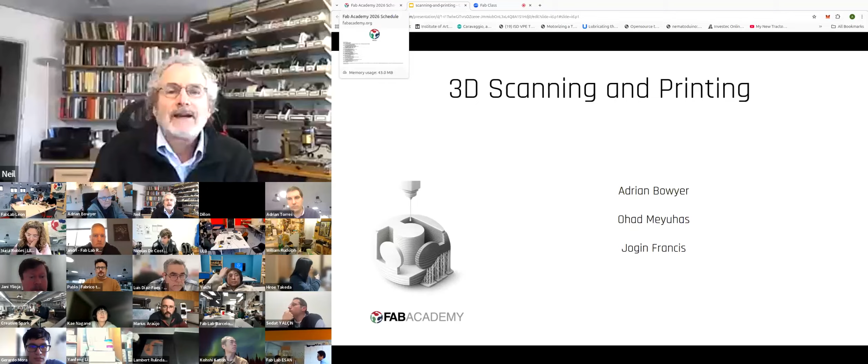So, welcome back. This week is 3D scanning and printing, which you might have thought from the outset was the heart of this class. The goal this week is to learn both the strengths and weaknesses of 3D printing, and we'll be seeing other ways to fabricate.

And we have a dream team for the faculty for this week. So, Jogin, who you met, who did the amazing random generator, was one of the instructors.

Ohad, can you introduce yourself? I'm Ohad. I'm part of the Fab Academy since 2012. I used to work at Stratasys, was the head of innovation, external innovation, and had different roles there. Now I'm doing my PhD on 3D printing multi-material for architecture scale.

Okay, and then the lead faculty this week is Adrian Bowyer, who for many of you might not need introduction. There are many claims to the original invention of 3D printing, but there's really only one claim to Adrian's role, which was he democratized 3D printing. He led turning it into an accessible thing that many people could contribute to and get access to. And so many of the printers around you directly trace back in some genealogy to Adrian, and maybe he'll share some of that.

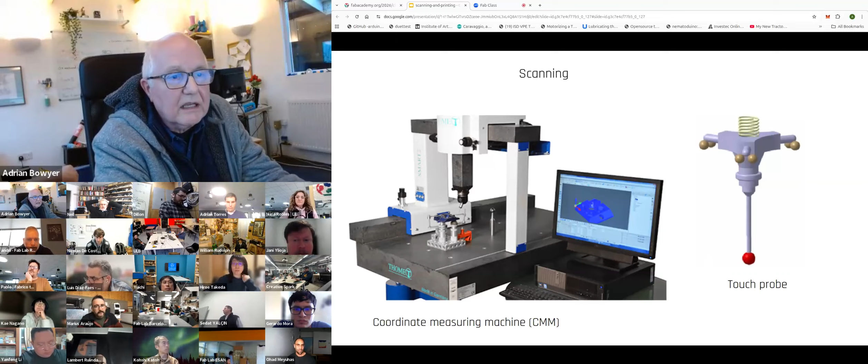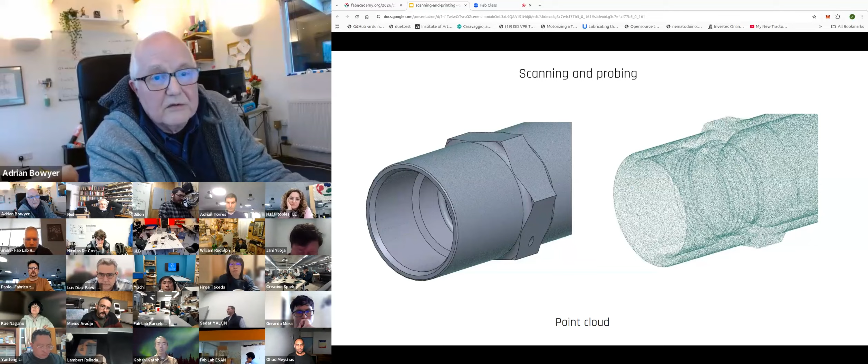We're going to have to turn that into something useful, because we couldn't, for example, take that information and 3D print it directly. We'd have to process it before we got to the point of being able to make a copy of the original object. So we've got to take that point cloud and turn it into something that's more usable.

There's no ambiguity about their surface. As soon as you've got 4 points forming a quadrilateral, those 4 points won't necessarily lie in a plane, and you're not quite sure which diagonal is which and what the surface is that they represent. So triangles, when we say polygons.

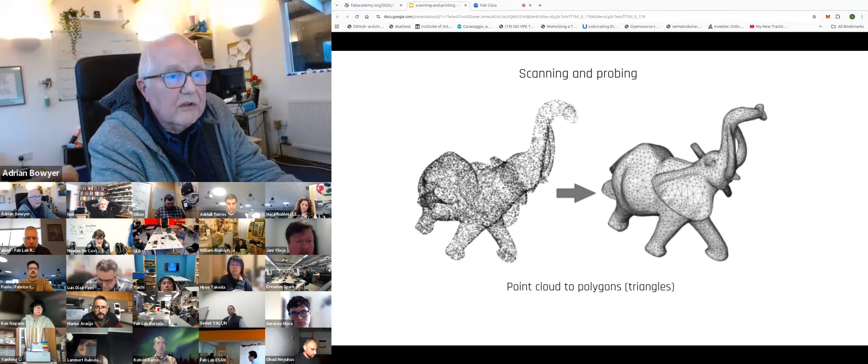You've got another problem to solve if you use the probe technique, and I'll briefly mention it here, which of course is that the thing you measured when you put the probe against the surface was not the surface, but the center of the probe. So it's actually offset from the surface a little way, and you've got to do something about that. I mentioned this because it introduces an idea that we're going to get to a little bit later on, which is the idea of a Minkowski sum.

But forget about touching. What we really want is a system that allows us to measure and scan objects which doesn't require us to touch them at all, so that we can use the same technique that we use when we use our eyes to look at a 3-dimensional scene. Almost all methods of doing this rely on some variation on the idea of binocular stereo vision. What we're doing is trying to reconstruct a solid, in the case of vision, inside our own heads, or in the case of some sort of scanner, inside the computer.

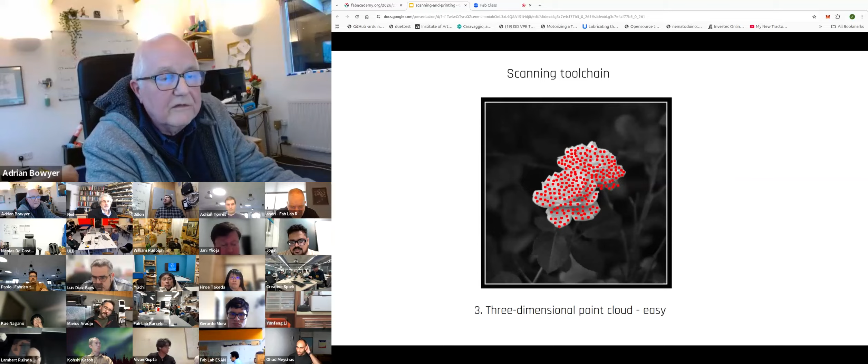And then the final problem that we have to solve is taking that point cloud, as I mentioned before with the elephant, and turning it into some sort of more structured representation of the object that we scanned. In other words, we have to triangulate it. And this, once again, is a hard problem. It's fairly easy for areas which are broadly flat, but where we've got lots of detail, it suddenly gets very difficult very quickly. So we've got these four stages to the process, two of them easy and two of them hard.

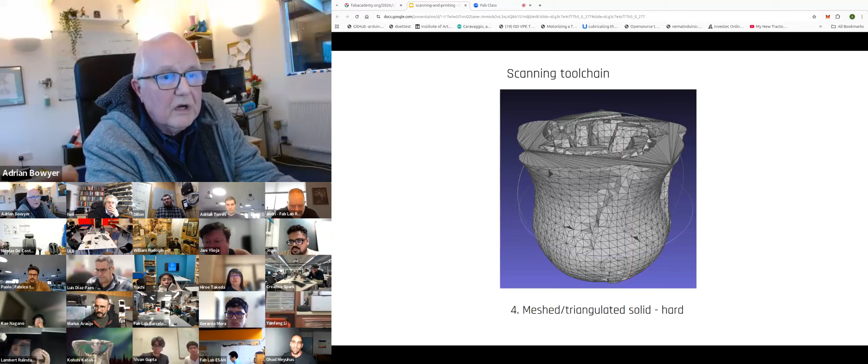Okay, let's look at the point correspondence problem to start off with. We can simplify that by forgetting about the fact that we might have two images, just have one image, but structure the light which is illuminating the object that we wish to scan.

So we might have a camera that's producing the picture that you can see, and then instead of a second camera to produce the second image, or instead of moving the camera to produce the second image, what we might do is to shine a laser into our scene, which will produce a bright dot on the object. And we've now got a piece of geometry which we can very straightforwardly analyze.

The computer can spot the bright dot on the image with no difficulty whatsoever. And once we've got that bright dot, because we know where the laser is and which way it's pointing, and we know where the camera is and which way it's pointing, we've got the 3-dimensional coordinates of the dot.

There are a whole series of different approaches to this problem that basically use the same idea: we have a camera and some form of structured light, the simplest being a sharp, fine beam of light like a laser produces, or a sheet of light such as a supermarket scanner uses to scan a barcode. There are all sorts of ways to structure light in order to figure out where that light hits the object we want to scan in space.

So this is one approach to the point correspondence problem. It short circuits the difficulty of recognizing that the corner of a petal in one image is the same thing as the corner of the same petal in a second image.

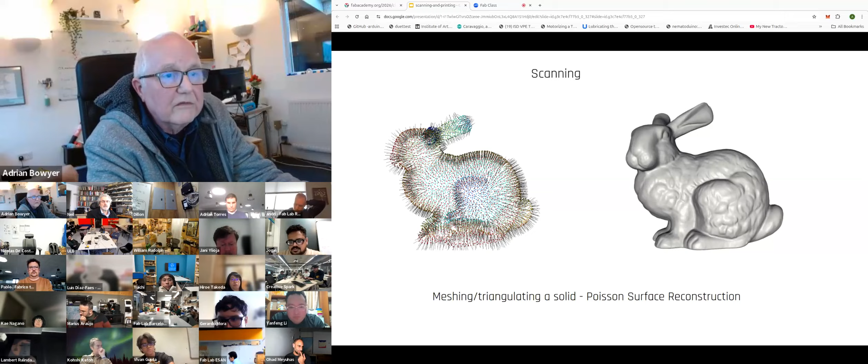It has 2 cameras within it, and it projects a pattern of infrared light onto the object to be scanned, which is rotated on a turntable connected by a white wire. The object rotates, the pattern of infrared light is projected on it, the cameras pick that pattern up and work out the surface of the object.

One of the nice things here is that because you've got the cameras, you can turn the infrared light off and see what color the object is where the infrared light used to hit it. That allows you not only to scan the object, but also to have a 3-dimensional representation of it in color, because the cameras can pick that up when they're not doing the actual scanning with light.

So this is a fairly straightforward machine. It costs about $300, I think - I can't quite remember what it cost when I bought it, but something like that. So they're not horrendously expensive. Quite a few Fab Labs have got exactly this device, which plugs into your laptop and allows you to scan an object and produce a 3-dimensional representation of it inside the computer as a triangulation, which you can then read into a CAD system reasonably painlessly. So that is a solved problem, albeit requiring some quite intensive computational work going on in the background.

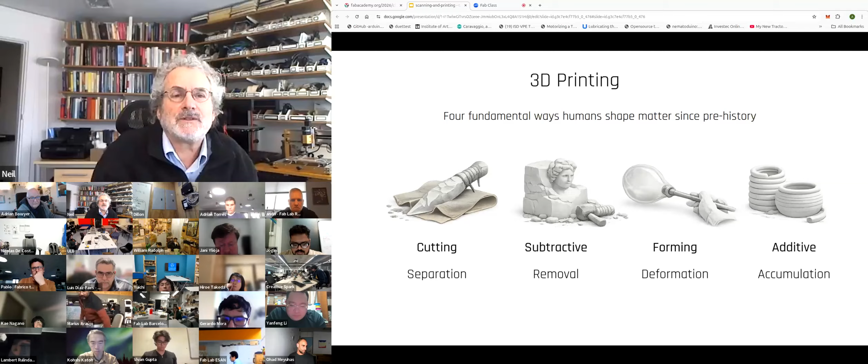Yes, indeed. And you can get such devices which project a whole pattern, an 8x8 pattern of timed beams, which will come back and give you an entire surface map of the object you're looking at. The typical ranges you can scan over with those is from, say, perhaps 200 millimeters out to 4 meters, something like that. So the latest generation iPhones have whole imagers actually doing this picosecond timing, so it's going to rapidly displace how we scan.

Okay, 3D printing. 3D printing is a way of making things. Let's look at making things. There are 4 fundamental ways humans make shape in solid objects, right since prehistory. Obviously, we can cut things - we could cut leather, we can cut cloth that we've made, or we can chisel material away.

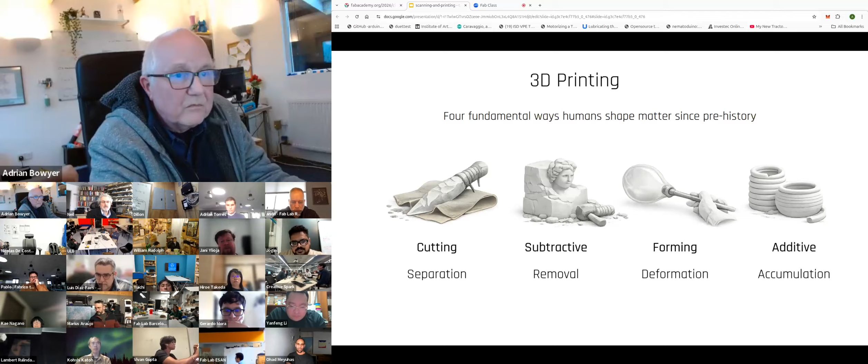We can take a block of material and subtract material from it to leave the shape we want. We can take material that's deformable, for example viscous but molten glass, and deform it into the shape we want. Or we can add material to make up the shape we want, for example as we might do with rolled out sausages of clay to make a pot. We're going to look at 2 of these in a little bit more detail in a while, but let's just go back and look at the history of 3D printing itself for the moment, and then we'll look at 2 of those 4 methods and compare them, one of which will be 3D printing.

So 3D printing goes back a surprisingly long way. This is almost 100 years old - it dates back to the 1930s. Many of you will have seen that these days people are 3D printing buildings by having a large Cartesian robot that moves a deposition head about to put concrete down. Well, here is William Urschel's 3D printer for producing buildings, and we've got a rather speeded up movie on the right-hand side there.

These buildings had to be cylindrical - it was 100 years ago. And what's more, the material had to be put in by hand, but you could stop it and form a window, as you've just seen.

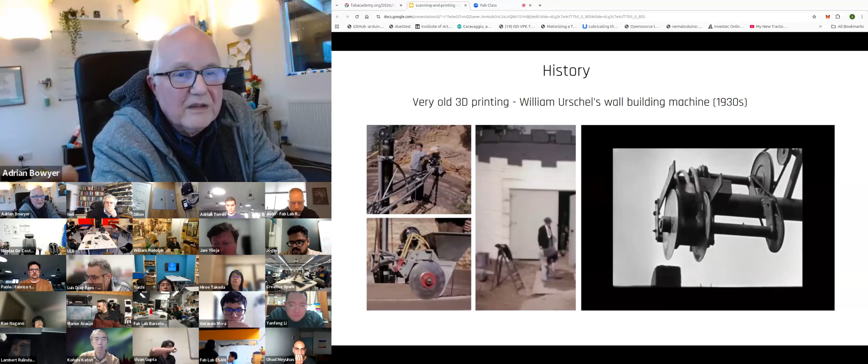Basically, two people had to continually be pouring cement that they'd mixed up into the right head of this machine in order to construct these circular buildings. This, as far as I'm aware, is the first thing that could really be called a 3D printer in the modern sense, and it was just about before the start of the Second World War.

The idea is that you have some photoresist material, a liquid monomer that polymerizes when light hits it, and you shine two lasers into it. At the intersection of the beams, the polymer is formed from the monomer because it sets in the presence of sufficiently intense light from those two lasers. In the notes, you'll find a link to two-photon 3D printing, and this idea is essentially that. It dates right back to this concept that Jones wrote as a joke, because he didn't think it would actually be possible to do back in 1974.

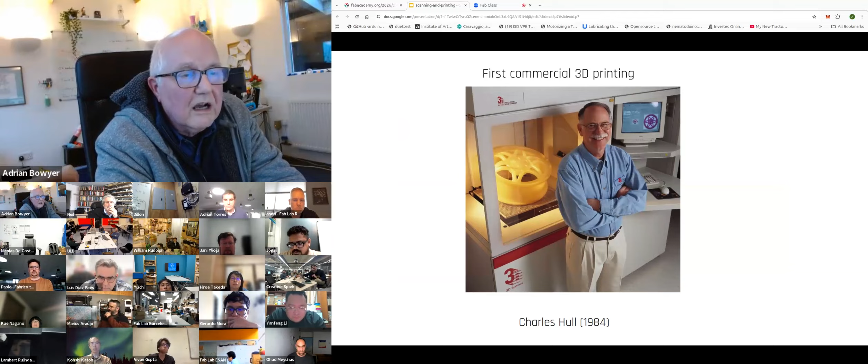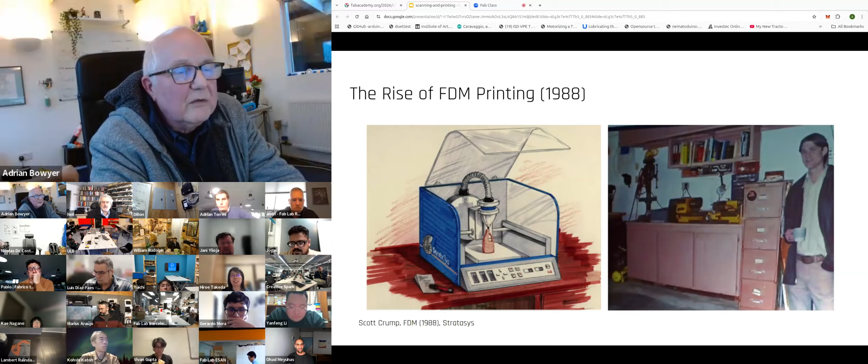Which he called FDM. He did it because, I'm told this by Ohad, his child requested him to produce a model toy, and they couldn't get to the shops. So he made the model with a glue gun, literally using it to scribble in three dimensions to make a plastic toy for his child. He then realized that this might form the basis of a production process. We'll be talking about this in considerable detail in a minute.

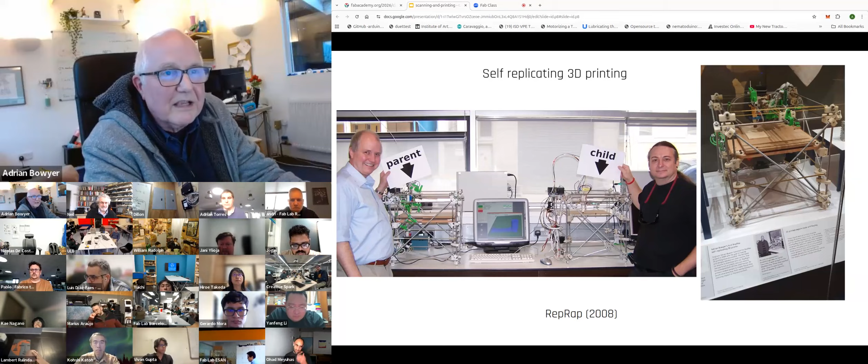You can almost certainly see from my image that I'm horribly old. I can tell you that it doesn't feel any older than it's possible to feel until you find your own object in the Science Museum in London. There it is on the right. I'm afraid that my own creations are now museum pieces, and there it is - that's the very first machine, also the one in the photograph on the left. So that's a 3D printer printing the parts for another 3D printer.

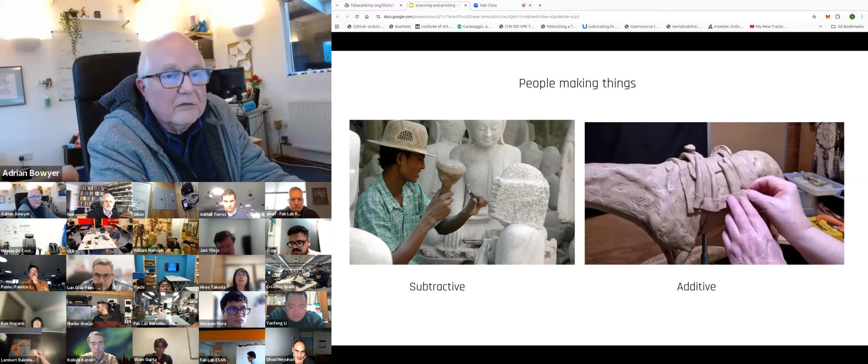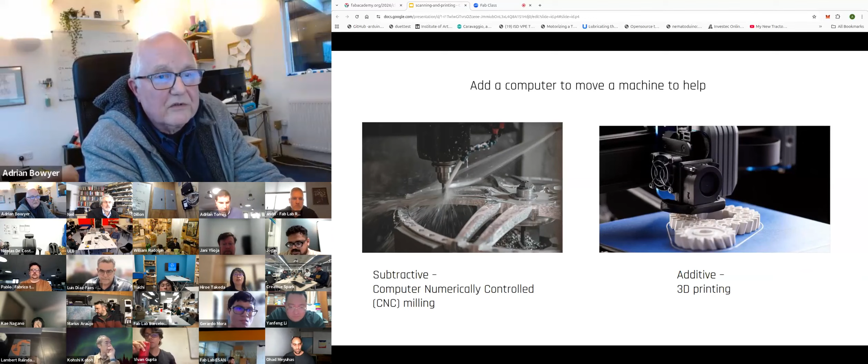Let's contrast these, as these are two principal ways of making three-dimensional objects, and see how they compare with one another. We'll start with the advantages of 3D printing, but we'll get onto the disadvantages in a little while.

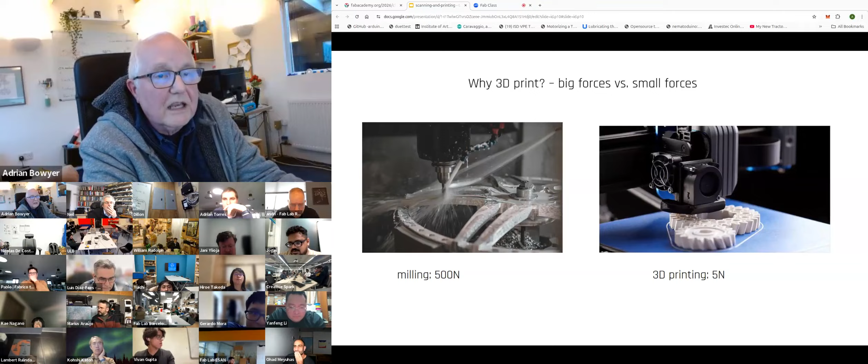So why 3D print? Well, the first and most obvious reason is big forces versus small forces. The sorts of forces you get with CNC milling are typically something like 500 newtons, perhaps. You need very rigid machinery with big castings in order to hold everything in the right place to resist those forces. In contrast, when you're 3D printing something, the typical forces you might be dealing with are something like 5 newtons, 100 times smaller. Admittedly, the process is slower, but nonetheless, the forces involved are comparatively negligible compared to those used with milling.

In contrast, with 3D printing we're always building in flat layers, which means the 3D printer really only has to worry about 2 dimensions and calculate things in 2 dimensions in order to solve the problem of manufacturing the object we want. Now, if you've ever written any software for dealing with geometric problems, one thing you'll have found is that as the number of dimensions increases, the difficulty of the software and the problems you encounter get an awful lot worse. So controlling a 5-axis CNC mill is simply a much more difficult computational problem than controlling a 3D printer, which only has to effectively, at any one time, work in 2 dimensions.

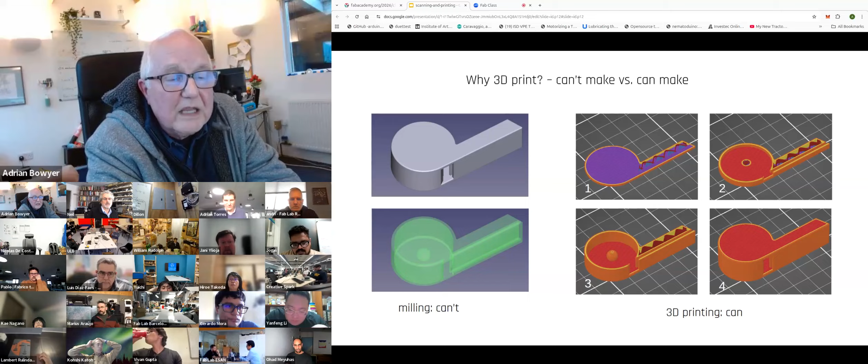On the other hand, if we 3D print this in layers, there's an illustration 1, 2, 3, 4 of the printing at different stages, we always have access because of the reason I mentioned on the last slide. So we can print the entire object, but we couldn't mill it. The little pea is still attached to the base of the print when it comes off the machine, but all we do is reach in with a small screwdriver, flip it away from the base, whereupon it rattles around the inside and makes the right noise.

The top of the whistle that you can see there, the dark red color in the final picture, that's unsupported when it's printed, and we'll talk about that in a minute.

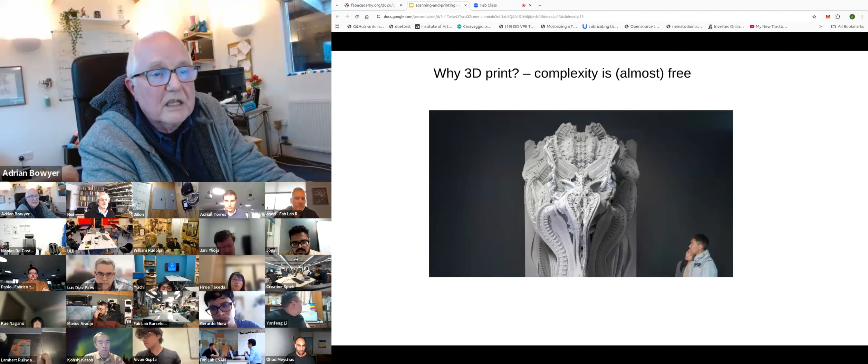Another thing with 3D printing is that complexity is almost free. The more complicated something you're milling, the more difficult that milling operation is, and the more time it will almost certainly take. No matter how complicated something is, you can almost certainly 3D print it in pretty much the same time as it takes to print something that's quite simple in shape.

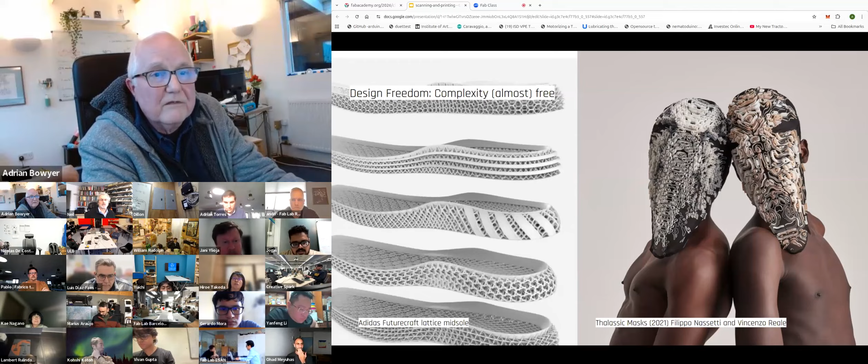Another advantage: milling creates waste. When you're cutting material, you get swarf, and that has to be disposed of and recycled. 3D printing is a near net shape process. We occasionally have extra material which we throw away, but nonetheless it's a much neater and tidier process with less waste material than milling.

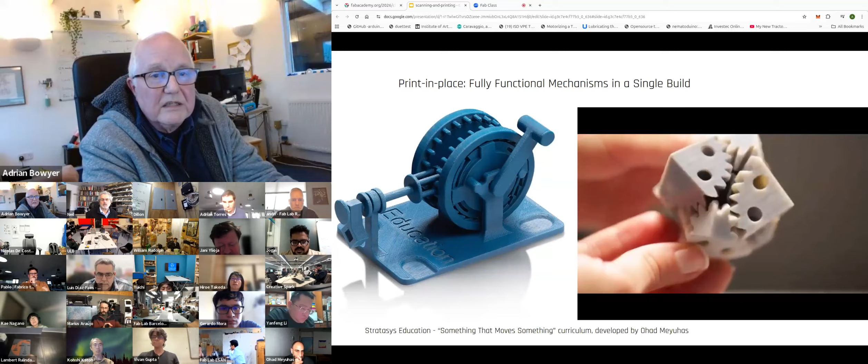Another thing we can do with 3D printing is make functional objects in a single shot, which is virtually impossible with CNC milling, and we'll look at this in a little while. In other words, the objects on the right were made in a 3D printer in one go. They weren't made in pieces and then subsequently assembled.

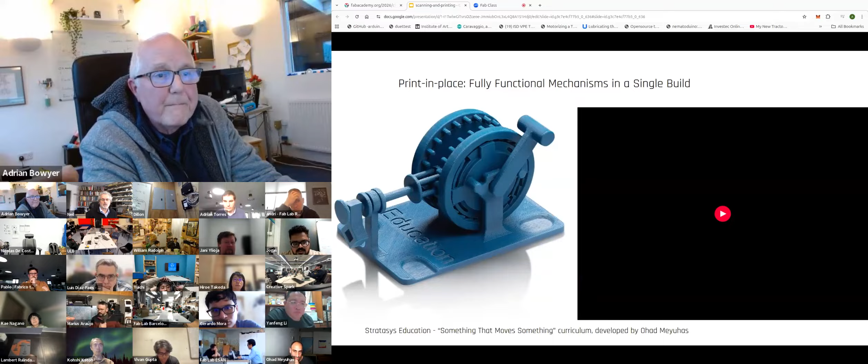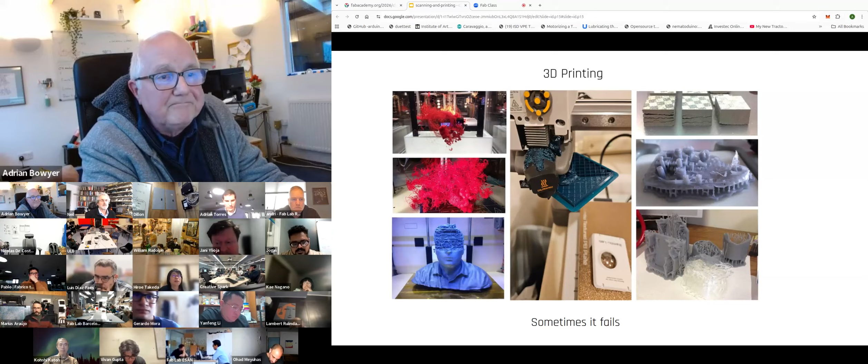SLA printing can also fail. We find that objects distort when they're not properly supported, and we'll get into that later. So it's not a perfect process.

I'm going to start by looking at FFF 3D printing. Most people know how this works, illustrated on the right in that little movie. We're extruding molten plastic, and it's sticking down to the plastic we've already laid down to form the next layer. We have a spool of filament, illustrated on the left, that's forced down through a heated nozzle. It melts, comes out from the bottom of the nozzle, and we build it onto the object. We have a build platform that gradually descends, or the head gradually ascends, and we build the object up this way. As I mentioned earlier, it's basically a computer-controlled hot glue gun.

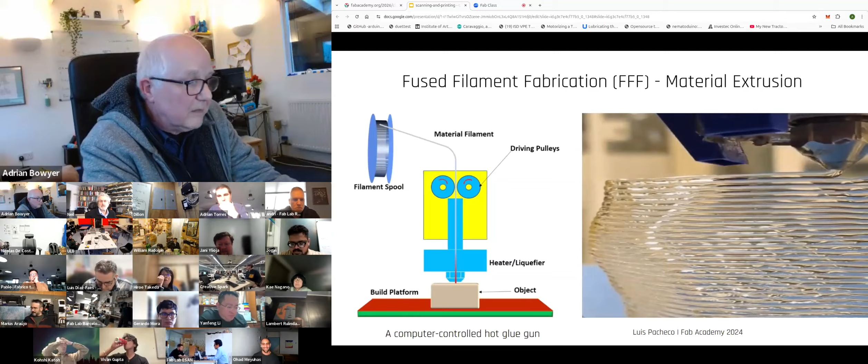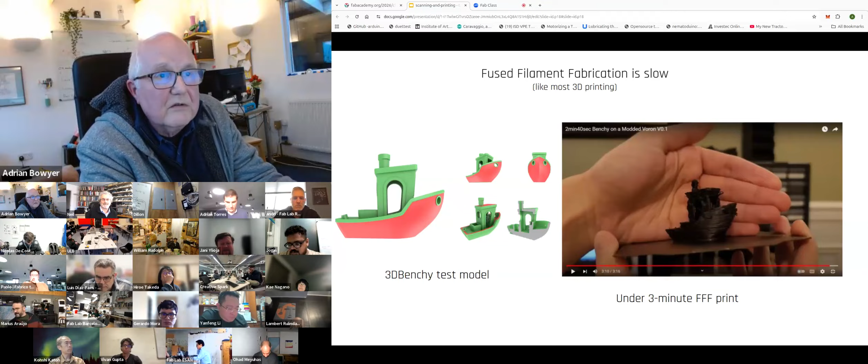Now, this is a slow process. On the left we have an illustration of a standard test object called 3D Benchy, and we'll return to that in a minute. But if we try to make something like this really fast, for example on the right there's an attempt to make this in 3 minutes, and you can see the result was not the highest quality. So it's a comparatively slow process to make things. That's the first disadvantage.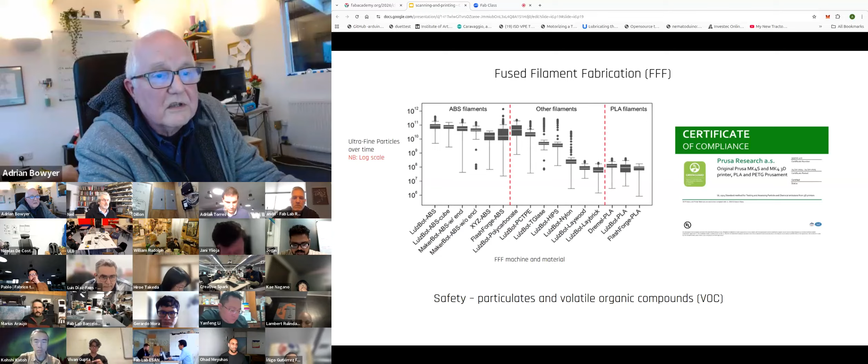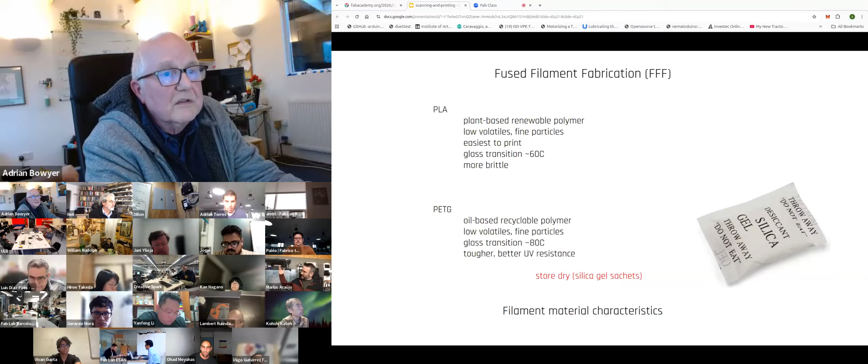PLA and PETG are the two most likely polymers you're going to encounter. PLA is plant-based. It's got a fairly low glass transition, so it won't work at very high temperatures, but it's very easy to print and works very well. PETG works at slightly higher temperatures and also has better UV resistance. Having said that, PLA often has titanium dioxide put in as a filler, which makes it pretty UV resistant as well - titanium dioxide being the material they put in sunscreen, which you wipe on yourself when you go and sit on the beach.

Okay, now let's look at some design rules for 3D printing. If you want to make the object top right, you're actually going to end up making the object top left. The reason being that as the machine builds that up in layers - in an FFF 3D printer this is - it can't support the overhang. So what we have to do is build up some extra material under that overhang, and we throw that material away when the print is finished, or ideally recycle it.

The material that does the support, called support material, is printed in such a way that it very easily detaches - it's very friable, it crumbles very easily, so we can detach it from our print straightforwardly. At the bottom you can see an illustration of a solution to the same problem, which is slightly more subtle - a brachiating tree-like structure that uses less support material to achieve the same result.

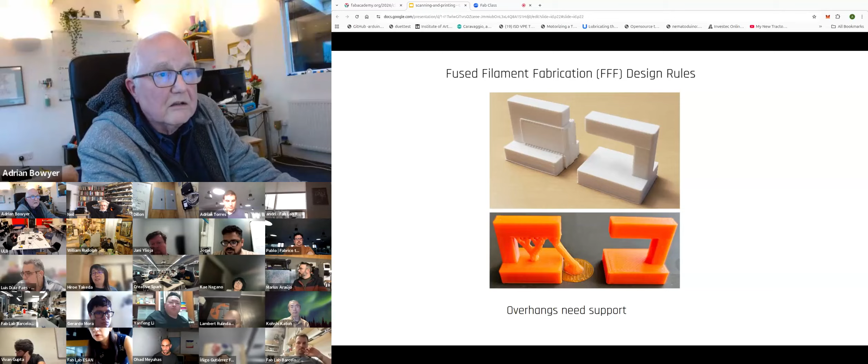Now there's another thing we can do as far as printing in thin air is concerned, and that's called bridging.

If we put a support at either end when printing a bridge with nothing underneath it, because the polymer, when molten, is a non-Newtonian viscous fluid, as long as we drag it quickly enough between one end and the other, it will stay reasonably well up in the air as it solidifies without dropping too much, and we can build a bridge without any support underneath it.

Now there's obviously a limit to this. You probably couldn't build a bridge 200 millimeters long in a conventional printer - it would sag in the middle. But as long as the bridge isn't too long, we can do that without support material. This brings us to a rather clever design of FFF 3D printer that came about by considering a number of these things, in particular the ability to print at an angle without needing support.

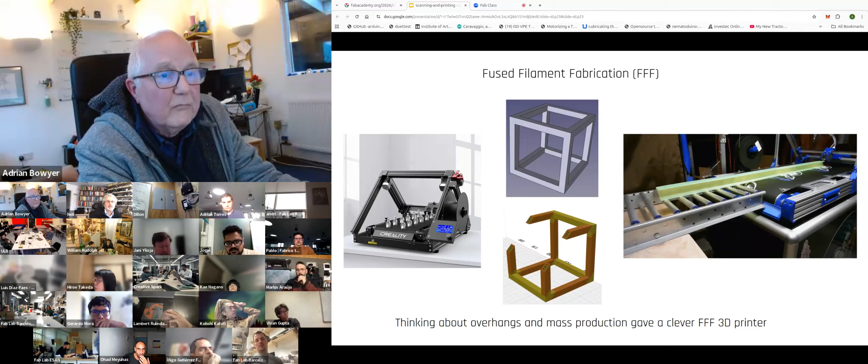Finally, and fairly obviously but interestingly, we can extend the belt on which the print is being done, and produce a print of any length we like. We can make a 6-meter long beam if we want in one of these machines, and that's obviously advantageous for many problems as well. Okay, back to the design rules for this type of technology.

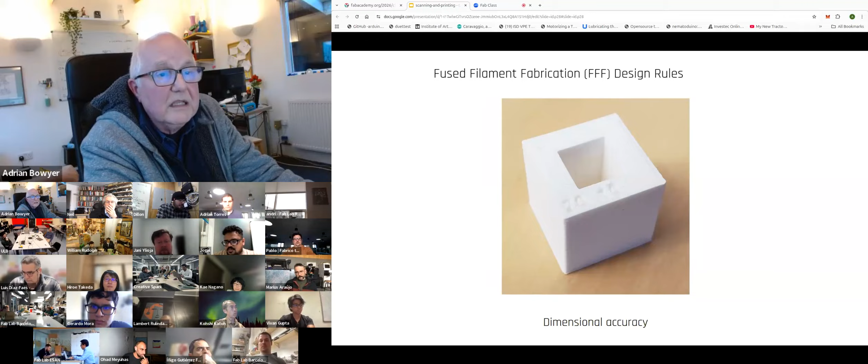Another thing is dimensional accuracy. Here's a block printed as a 20mm block with a 10mm hole. You'll discover that when you make holes in objects and print them, the holes usually come out a little bit undersized, and you often have to allow for that. The exterior dimensions are normally not too bad, but the interior dimensions sometimes can be a bit undersized.

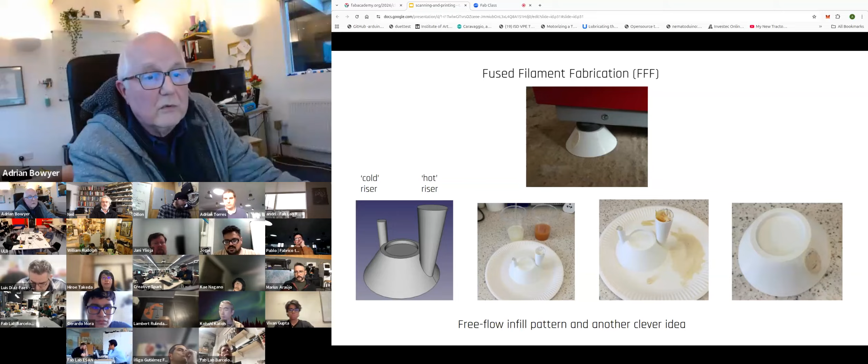Bed leveling. When you've got one of these machines, the bed will be almost level, but it's never perfectly level. And when the machine is moving about to print, it has to allow for the fact that the bed is not perfectly level.

Almost all of these machines are capable of detecting when the nozzle touches the bed, and they use this to map out the bed before they start. So you touch the nozzle onto the bed repeatedly in a square pattern all over the bed, and you end up with a map of the bed, as illustrated on the right there. That map has got the vertical dimension very much exaggerated - it probably represents only about 0.2 of a millimeter or so difference between the top and the bottom.

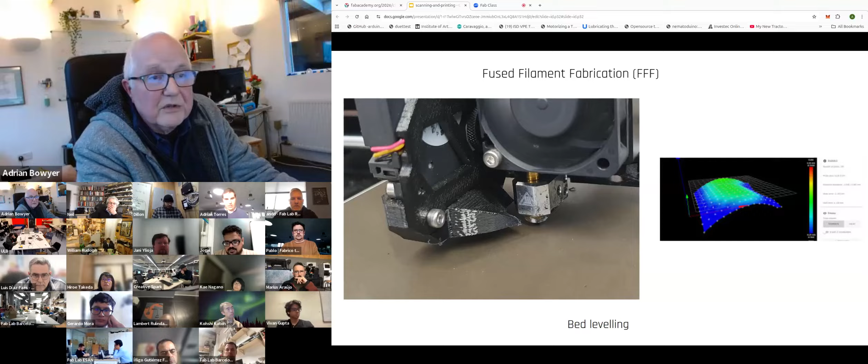The machine can then use that map when it's actually doing the print in order to move the head very slightly up and down to get a consistent distance between the nozzle and the bed. This is very important so that the very first layer of the print adheres strongly to the bed and doesn't detach itself. This is a trick that almost all modern FFF 3D printers can do.

But it leads us to another idea, back to that coordinate measuring machine with its spherical probe. We can actually turn a 3D printer into a coordinate measuring machine. If you hold a ball bearing under the nozzle and extrude a little bit of plastic and let the whole thing go cold, the plastic will hold the ball bearing.

And because the printer knows when its nozzle touches something, you can use the printer to move around in space and digitize a three-dimensional object. The result won't be very good, but it will be adequate for some purposes, and it's quite a neat sort of application of the technology.

Another aspect of 3D printing is that you sometimes, in addition to support material, need to add other material. This normally goes under three titles: skirt, brim, and raft.

A skirt is a run of material around the outside of the object you're going to print. All this does is clear the throat of the printing nozzle, making sure the filament is flowing properly before you start the print.

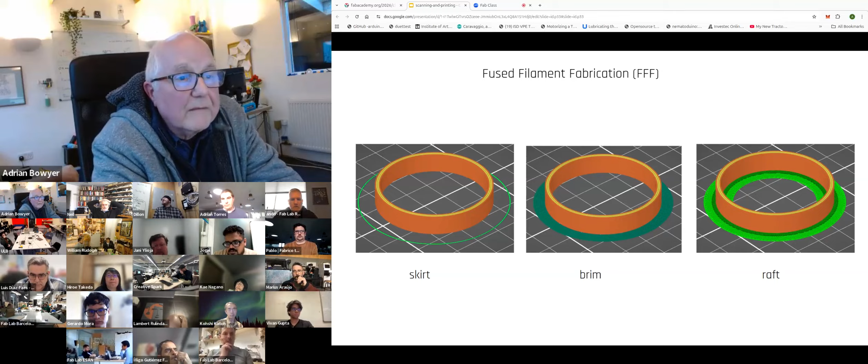It's just a way of making sure everything's working. If you've got a small surface area in contact with the build plate, sometimes it doesn't stick down well enough and the print will become detached, as we saw in the problem prints slide. So you can add some brim, which increases the area at the very bottom of the print and stops it from detaching from the bed.

Finally, we can have a raft, where we lay down some material underneath the print before the print even starts. This essentially solves the same problem as the brim solves, plus also allows us to level things up a little bit before the print gets started.

Another trick we can do is stop the print partway through and insert things in order to produce more active objects. Here's a rectangular block that I wanted a pattern of high intensity magnets in. I left cavities for those magnets in the design, paused the print when it got to the top of those cavities, put the magnets in by hand, then resumed the print.

The print carried on printing over the top of the magnets, and I ended up with a rectangular block with a pattern of magnets embedded in it that I wanted. You can use this for other things as well, as we shall see in a minute.

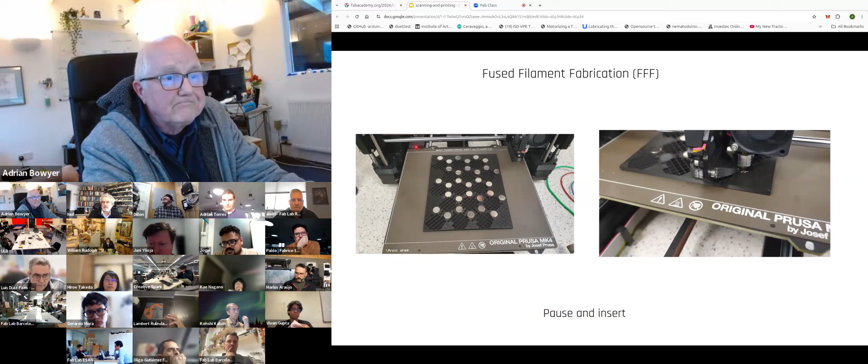Another thing you can do is mess about with the way the infill works. For example, you can take a random pattern of very fine cylinders and subtract them from an object. This seems kind of crazy, but illustrated top right, that object has had a series of random cylinders subtracted from it.

The effect of this is a little bit like making the object out of fiberglass. That's because the printer will print those cylinders in such a way that they have a continuous surface as opposed to the infill, which has the effect of reinforcing the print.

But we can be a bit cleverer than that. If we take a simple beam in a CAD system like FreeCAD, which has a built-in finite element modeler, and we load the beam before we've even manufactured it, we can figure out where the high stresses are if it's clamped at the left and loaded at the right. Unsurprisingly, the high stresses will be at the top and bottom of the left-hand end of the beam.

We can then subtract some fine cylinders interior to the beam at that point and print it with those cylinders in, and the machine will lay down extra material just where those cylinders are. If we then test the beam with and without those cylinders, as illustrated in the middle by hanging weights on it, on the right you can see the results.

We've got deflection on the y-axis and the load in newtons on the x-axis. The blue curve is the unreinforced beam and the red curve is the stiffer reinforced beam. So we can put internal structure in a print which you'll never see, but which nonetheless achieves different mechanical properties.

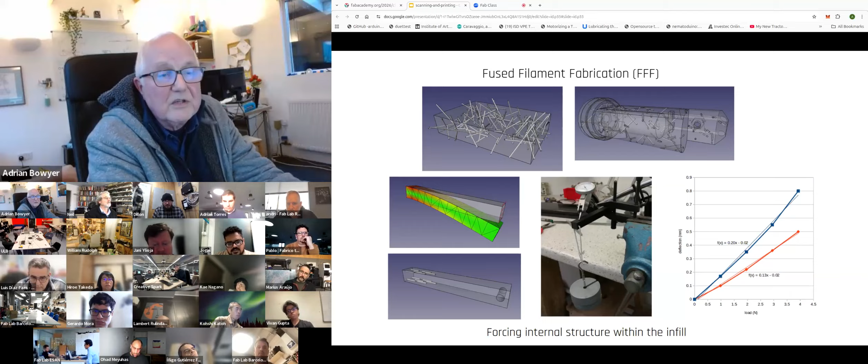With fused filament fabrication, we can have more than one material. This allows us to do colors, so we can have multicolor prints. There's our 3D Benchy again.

We can combine hard plastic and rubber-like plastic to make objects which are rigid in some places and bend in others. You can get filament which is electrically conducting, so you can build a print which has embedded conductors within it.

A slight warning here: if you're used to copper, which has a resistivity of 17 times 10 to the minus 7 ohm centimeters, the conducting filament is about 10 million times worse. So it's a conductor, and with a fairly chunky piece of it you can illuminate an LED, but it's not like working with a metal as far as electrical conductivity is concerned.

Another thing you can do with a multi-material printer is have soluble support materials. Here on the right we've got a print which we want, the black part, but the white material is soluble. If we print the two together, the soluble material acts as a support. We then drop the whole thing into water and the soluble material dissolves away, leaving us with the print that we want.

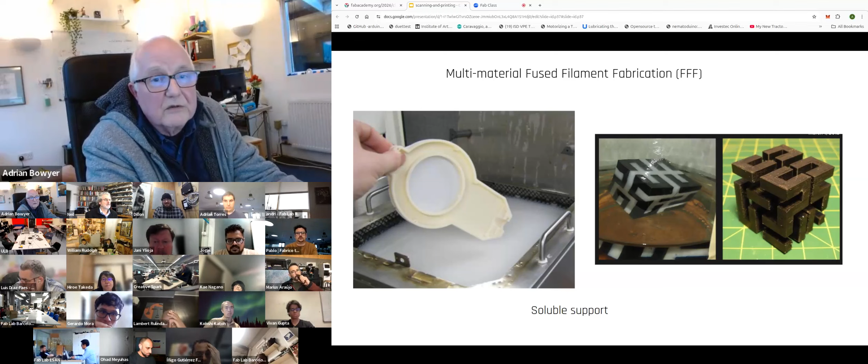The usual soluble material uses PVA, polyvinyl alcohol, which is water soluble. But there are others that will dissolve in sodium hydroxide and other slightly less benign things than water.

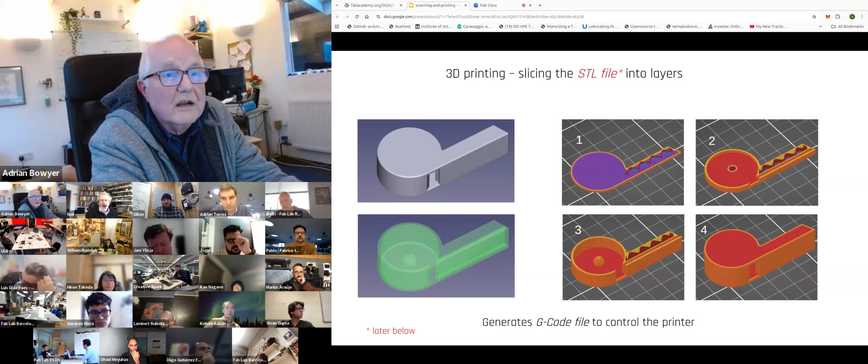One of the things we've got to do with our 3D print, once we have the object we want to print, is turn it into layers. The object is represented by an STL file, and we'll talk about that in a minute. What we do is take the object and cut slices through it inside the computer to work out what each layer will print like. This generates a G-code file to control the printer. G-code is a standard code for controlling numerically controlled machines, not just 3D printers but CNC mills, CNC lathes, all sorts of things. They're all controlled by G-codes.

If we briefly look at the output of this slicing process, here we've got three G-codes. Now, you can take these files, they're text files, and edit them by hand if you're feeling brave. But there is the danger that you might move the machine to the wrong place and cause it to collide with itself.

But the G-codes are pretty straightforward. For example, a G1 just says move somewhere. So the top command is saying move to X0, Y0, Z3 - in other words, the origin of coordinates in X and Y, and 3 millimeters high in Z. The feed rate is in millimeters per minute, so 2.4 meters per minute. We then want to move closer to the machine's bed, 0.2 high, at a slower rate.

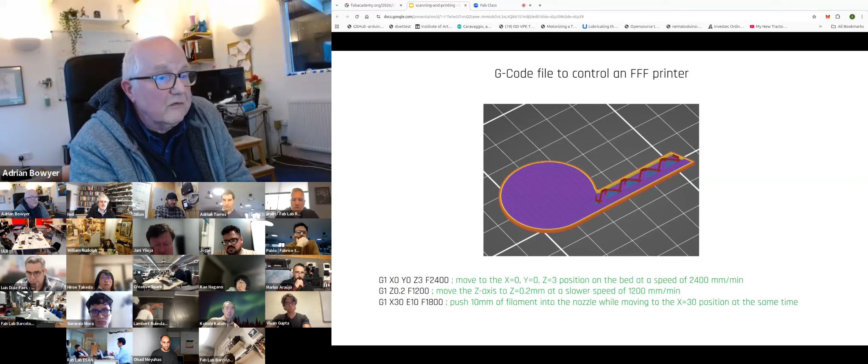Then we might move and start doing some printing. The third line moves from X equals 0, where we were, to X equals 30, but it's also extruding 10 millimeters of filament while it does so. The G-codes just treat extrusion as another dimension like X, Y, and Z - we can extrude a certain number of millimeters of filament, just as we're moving a certain number of millimeters around in space. That's a standard format, and you can edit it directly or create it directly if you're feeling brave, though it's much more usual to do it automatically.

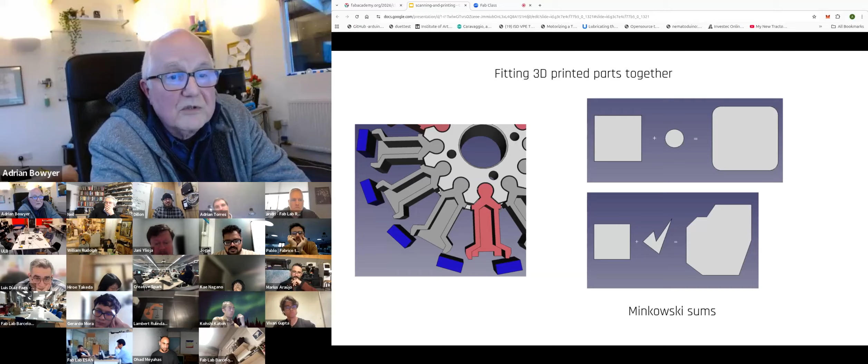But you can take the Minkowski sum of any shapes. For example, if we take the square and add that sort of stabby, sharp shape to it, we end up with the thing on the right there. Some CAD systems can do this, notably FreeCAD, because FreeCAD incorporates OpenSCAD, which has a Minkowski sum operation.

The general rule here, because this is quite computationally intensive to work this Minkowski sum out, is to keep the added shape as simple as possible. You might think you always wanted to add a sphere, but the trouble with a sphere is that it consists of lots of triangles, many more than a number of triangles needed to represent a cylinder. As a consequence, a sphere is more difficult to add than a cylinder. So keep the added shape as simple as possible.

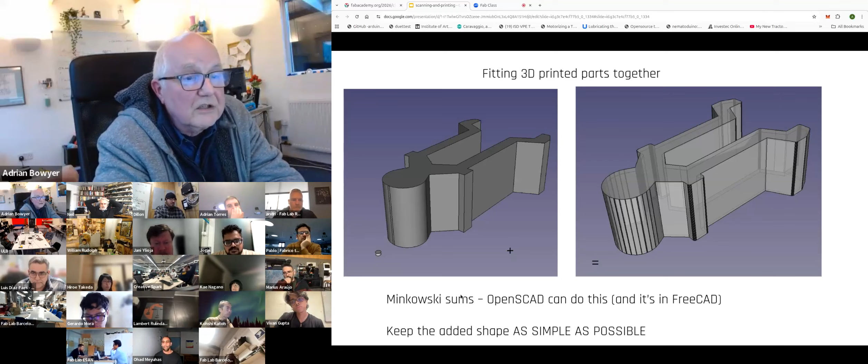Post-processing 3D prints, we can paint them with paints, we can paint them with resins. This is slightly dangerous, so be very careful if you do this.

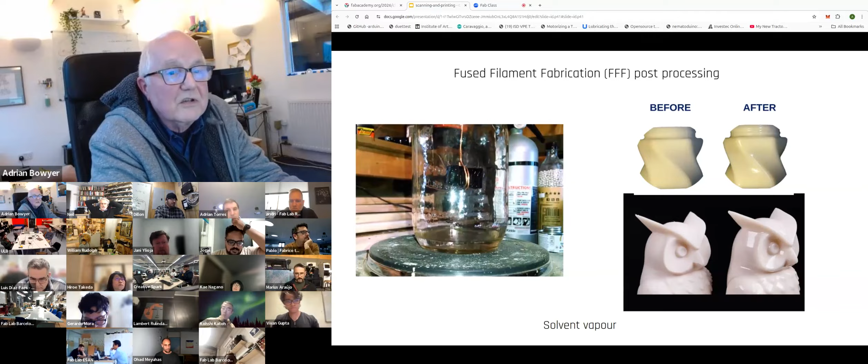You can take a 3D print and put it in a solvent vapor. You've got an organic solvent that's a solvent for the 3D print material. You suspend the print above it and warm up the solvent, and the vapor causes the surface of the 3D print to dissolve very slightly, and surface tension then smooths it off. Obviously dangerous - first of all, you don't want to be breathing in solvents, and secondly, you're heating an inflammable material, which is obviously dangerous and to be treated with extreme caution, but this is something that's sometimes done.

You don't need to have a thread in your 3D print to do this. If the screw is going to be a steel or brass screw, you can just use the thread on the screw itself to cut its own thread in the 3D print. If you make the hole slightly undersized, that works fine. Or you can get these little inserts, which are threaded inserts, which you can insert with a heated soldering iron into holes in a 3D print, and then you've got, for example, a brass insert that's threaded.

Finally, using the trick which I did with the magnets, you can leave cavities in your 3D print and drop nuts into them, into the print, in order to have a solid steel nut inside a 3D print, which you can use to then attach it to something else. And you can either have those accessible when the print's finished, or you can have them embedded so that they're never seen again.

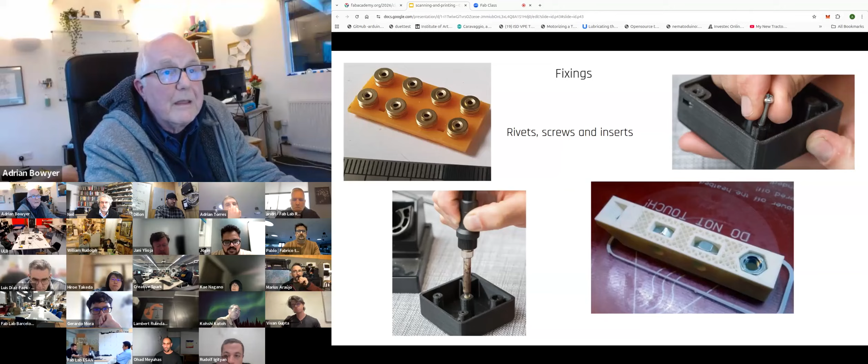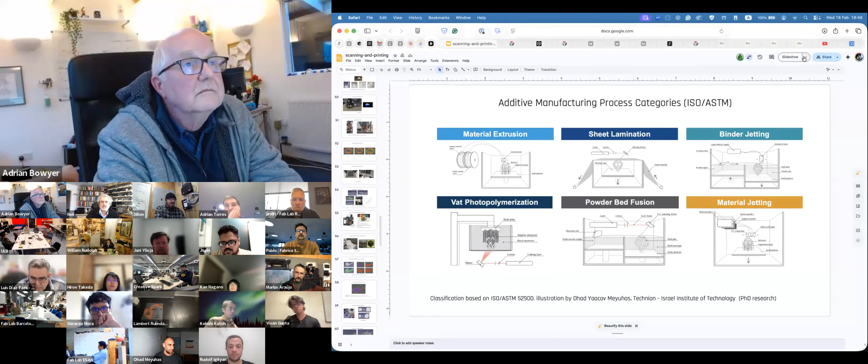Okay, so Adrian, thank you so much, and I think that it's a privilege to work with you. There was a question about what's the difference between subtractive and cutting. So sheet lamination - this process is actually working on cutting layers of sheet and glueing them into each other, creating a three-dimensional model.

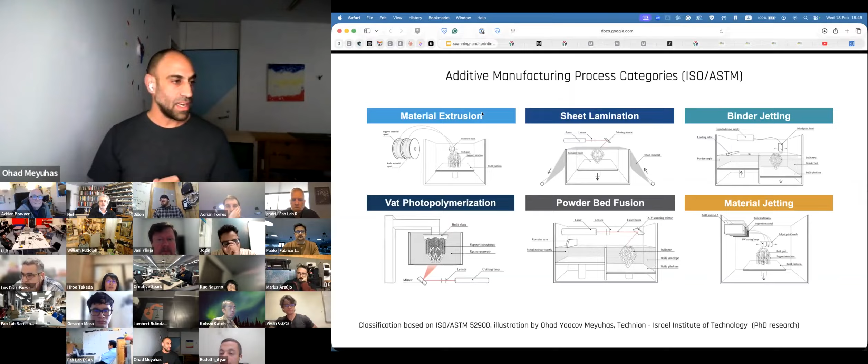The ASTM and the ISO define 7 categories of 3D printing. We've been in material extrusion - we just learned about material extrusion. Let's move to vat photopolymerization.

So everything that Adrian was talking about was about thermoplastic, which is actually plastics that when you heat them, they deform and you can create whatever you want with them. An interesting part is that you can reuse them - you can reheat them and use them. Thermoset is a different process of polymer. You need an actual chemical reaction in order for them to be hardened. So you start with a liquid, and then...

Most 3D printing processes use a photopolymer, where you use a UV light to harden those materials.

So let's talk about the first 3D printer technology that we know of, stereolithography. So what we have over here, we have a laser that goes - and actually this is not the correct diagram, the model is supposed to be on a bed. So the tray, this is our tray, it goes up in a layer height, and then the laser is hardening the liquid by pointing a UV light in the right range for this specific material.

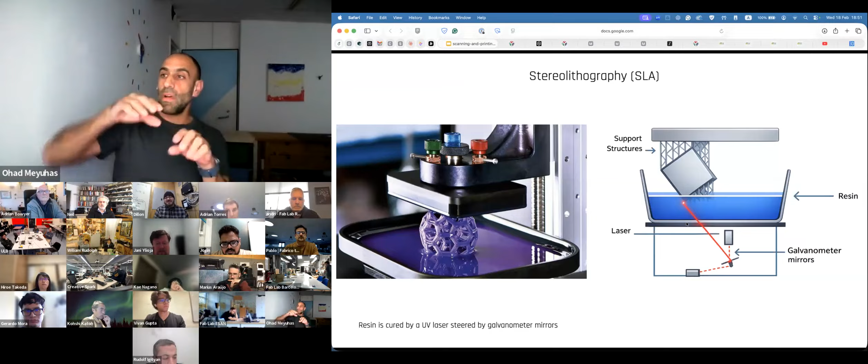And each time, the model is going to go up, and then we are going to have another layer to be printed by that.

In vat polymerization, there are mainly 3 different technologies. One is SLA as we know it, which works with a laser. Each place that's going to harden is a laser point, so it's actually a vector printing.

Then we moved to DLP, which uses a projector. The projector projects the entire layer each time, so instead of moving to a contour and then filling it in, you can project the entire layer instantly, making the printing faster.

But remember, a projector is pixel based. So instead of vector printing like before, now we talk about pixels, or actually voxels, which are 3-dimensional pixels.

MSLA, which is now more common, uses an LCD screen on the bottom of the tray, projecting a different layer each time, so again it's pixelized. Looking at these technologies, SLA is more precise but slower than the other technologies.

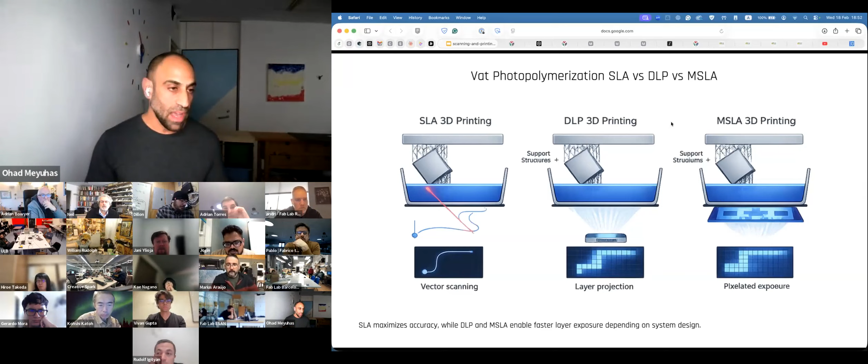Using resin for 3D printing, you need to take some protection. During polymerization there can be a lot of smell in the room. Remember the resin itself is not plastic yet, it's not hardened, so you need to take care of yourself, wear gloves, and better to have a mask as well. In many cases you also need UV glasses.

After we print, the part can be deformed because it's not fully cured yet, so you need to be very gentle with it. Usually at that stage we remove the support and put it in a bath of IPA. It's better to use an ultrasonic wash, but in many places we don't have one, so we put it in the bath and shake it a bit.

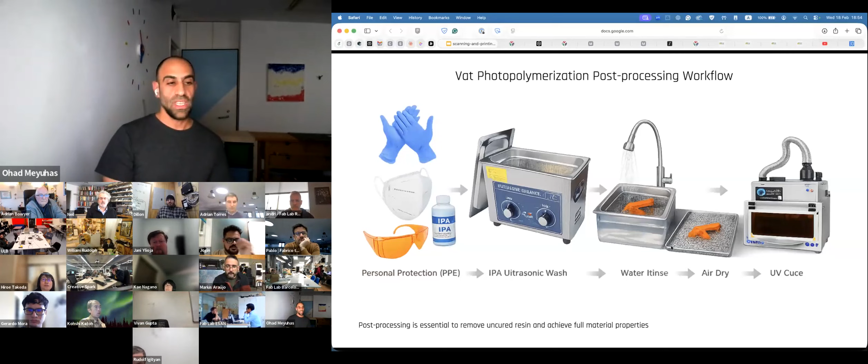Then, depending on the material, some ask us to wash it after with water. Some just say let the IPA dry in air, and then you put it in a UV cure chamber. This process is very toxic, which is why it's recommended to have a BOFA unit or good ventilation when you do that.

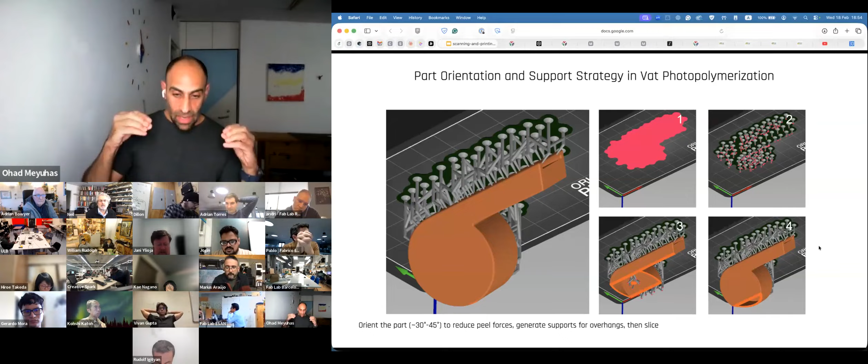Usually when we print with polymerization, we put the part at a 30 degree angle. The reason is because we're using liquid, so we want the liquid to drain out of our model. Also, due to movement it can get stuck to the tray itself if we don't use the 30 or 45 degree angle.

With SLA and those technologies, you get finer details and higher accuracy, but you use a mono material, whereas with FDM, as Adrian showed, you can have multi-material. There's also a lot of post-processing after. Sometimes we think this technology is faster, but actually the post-processing takes more time, and the part is non-recyclable.

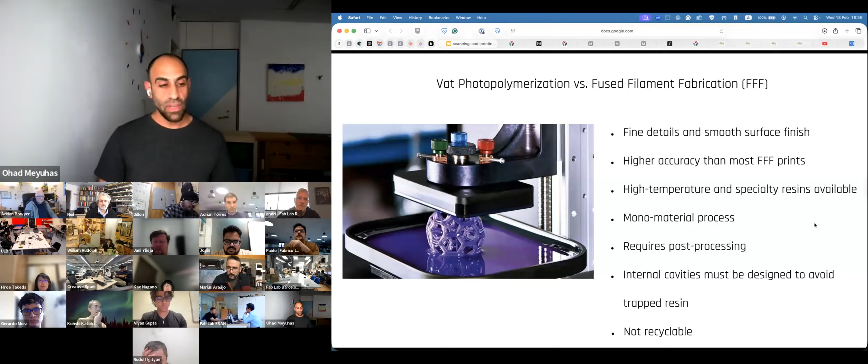I'll be very fast with multi-material printing. In multi-jet printing, you have multiple heads that print like an inkjet, dropping off material, and then usually a roller flattens them. So you get those voxels.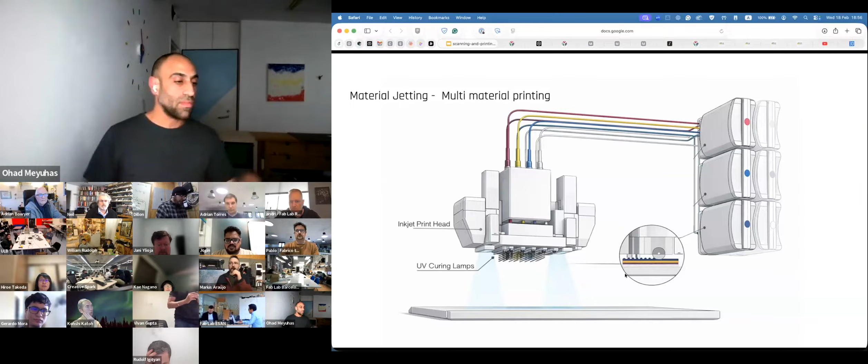The idea of that technology is that the material cures as it falls down, due to UV lamps, and you can use multi-material as part of that, so your print can have multicolor or multi-material behavior.

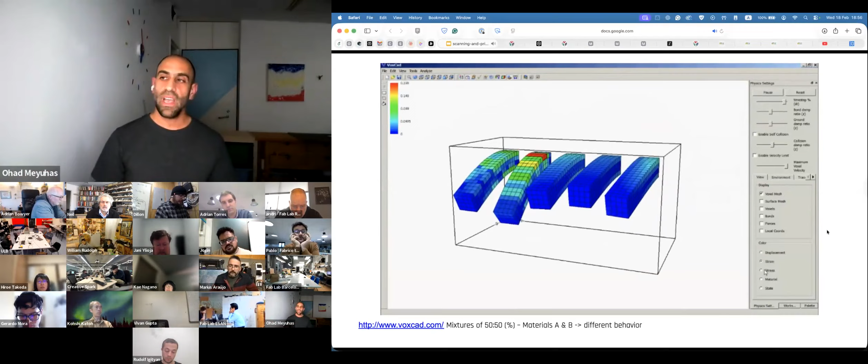In a project we've done, we asked engineers: if you have beams of 50% rigid material and 50% flexible material, how would that behave? When we put gravity on that, we showed that because of how you populate the part internally, they behave completely differently. Companies like Lockheed use this for impact absorption and other research. So it's not only how your model looks from outside, it's how it behaves from inside.

In medical applications, the ability to have a range of different behaviors allows us to mimic medical conditions and helps doctors practice before their surgery.

We had a surgery where the doctor came to me and told me there was a child with a heart defect, and the surgery was going to take more than 60 hours, and most likely she was going to die.

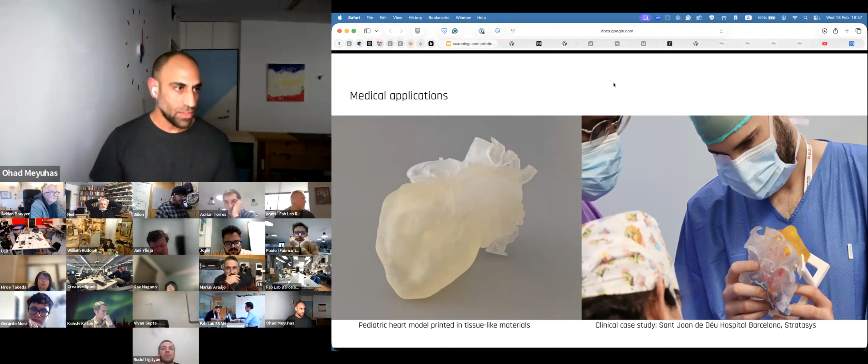After we printed plenty of hearts mimicking this child completely, he practiced, and the surgery took 15 hours and she survived.

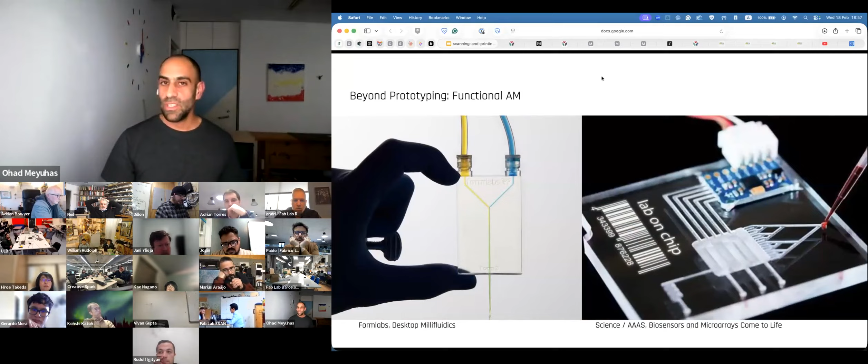So this is what you can do by mimicking behaviors. I won't talk about lab-on-a-chip, but the fine details you can achieve now allow us to move beyond what we expected before.

My recommendation for learning about all these different technologies is this book. We put a link for that book. It covers most 3D printing technologies, showing showcases, what can be done, and what's recommended for which technology.

So let's move to our assignment. You have a group assignment. Adrian showed you lots of rulers for how we use them to make sure our printer prints well. You need to know your printer before you print, to understand what it can do. Some printers have different wall thickness capabilities and different behaviors. That's the first part of our assignment.

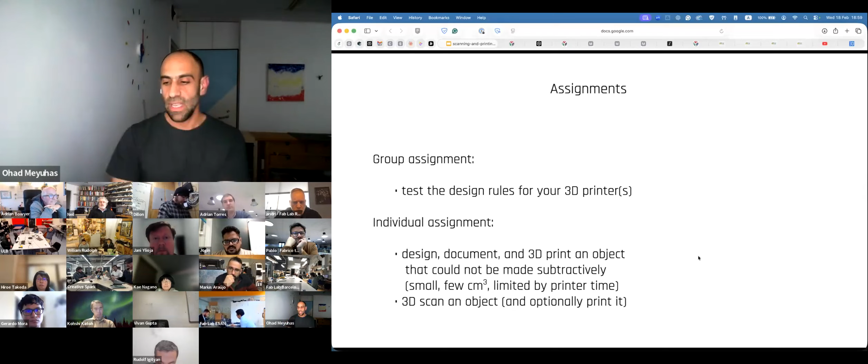The main assignment is to design a 3D printed object that could not be made subtractively. I know you haven't done subtractive yet, but think about the advantages of additive manufacturing that Adrian just discussed, like how you can enclose parts within parts and make them move, or make models that cannot be made in a different way.

I'll show some examples. Per Fab Academy, we always need to make sure we're not taking up the storage of the Fab Academy.

Yeah, Ohad, we're at 12 o'clock. Okay, so...

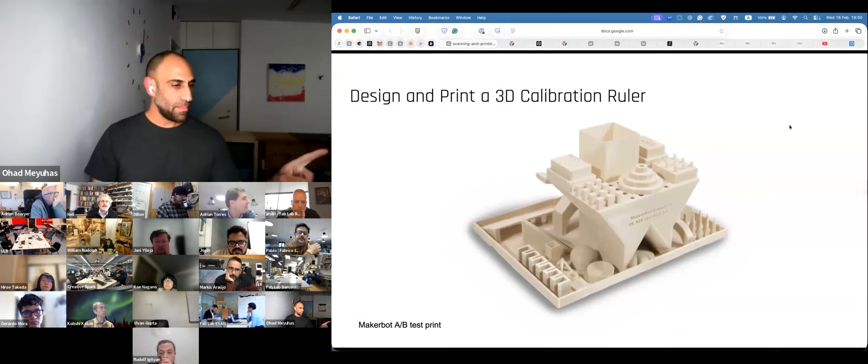We are going—I wanted to show this is the book, just a minute.

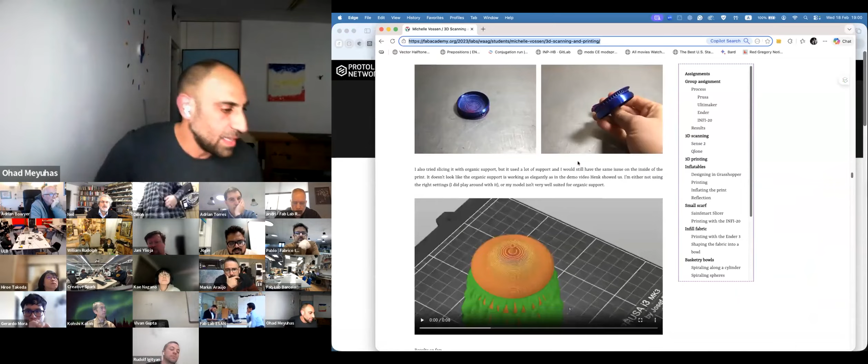I think this page shows one of the most interesting students from previous years, this is from 2023 from the Waag. What she did was print a model and then post-process it by heating it, then inflating and deflating it, to check if the model was watertight after printing. It's an interesting project.

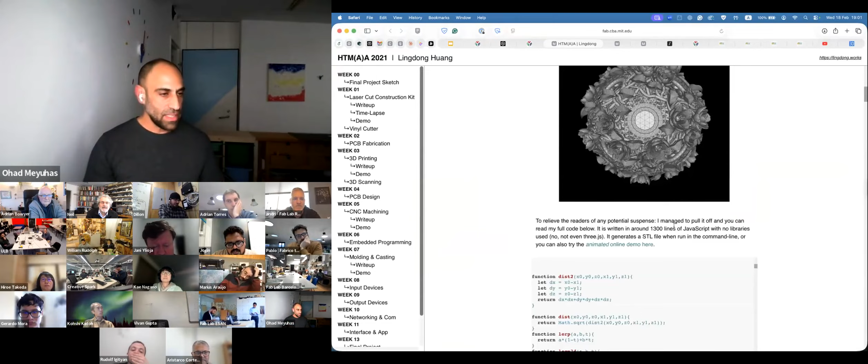This project is part of Neil's course. They took Chinese balls, which is a ball within a ball within a ball, and created a very interesting, notable design, because the web page itself is the design tool—he just wrote code to generate the STL.

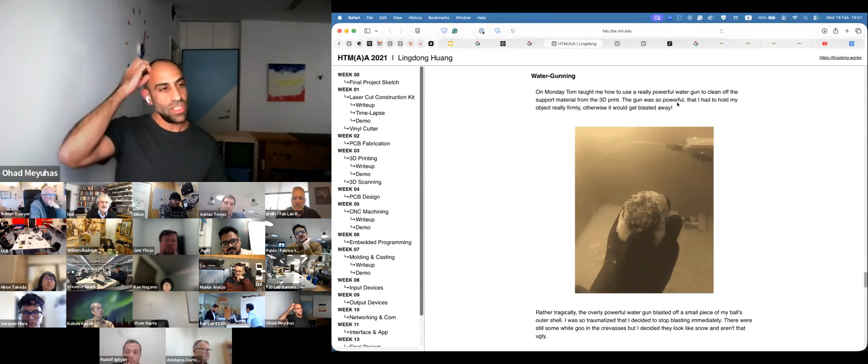And very quickly, he also talks about post-processing that completely destroyed part of the model. So this is something to take into consideration—when you remove the support in any of these technologies, you need to think about that before you design it. Orientation is important.

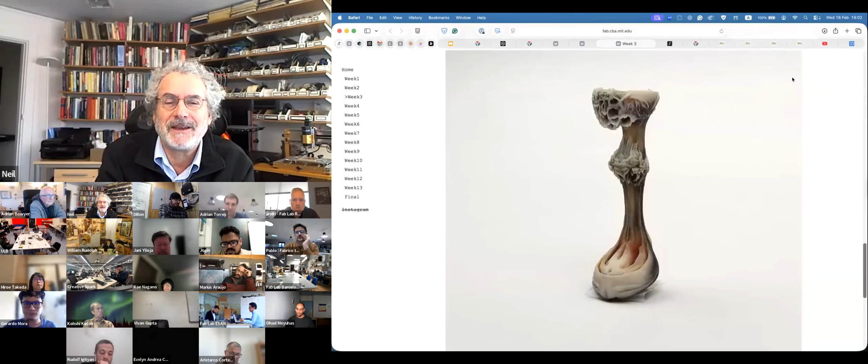We're over time, but very quickly let me show Valdemar. This was a student in the early days of AI who, instead of designing it himself, asked AI to design a surreal vase and submitted that for the homework. That counts as design as long as you document the workflow. This used a Stratasys multi-material printer—an extreme form of something you couldn't easily make subtractively with an AI design workflow.

And maybe I'm just going to put that. Okay, it doesn't work, but...

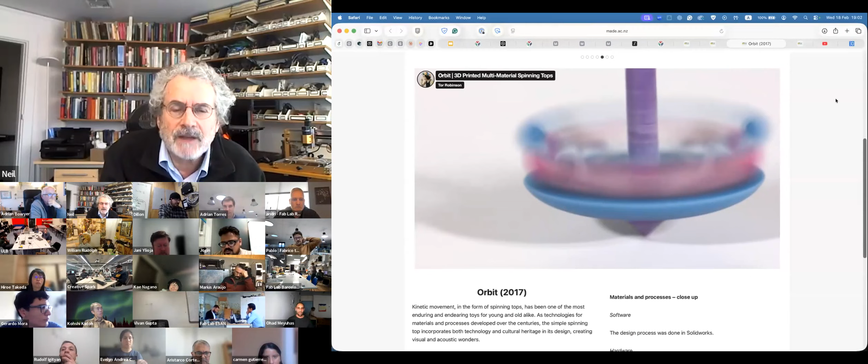So in the last minutes: scan anything. There are a lot of good photogrammetry apps linked on the class page that work on cell phones—these are rapidly maturing. For extra credit, you can print the object you scanned, which can be non-trivial. But the heart of it is the design task of something not made subtractively.

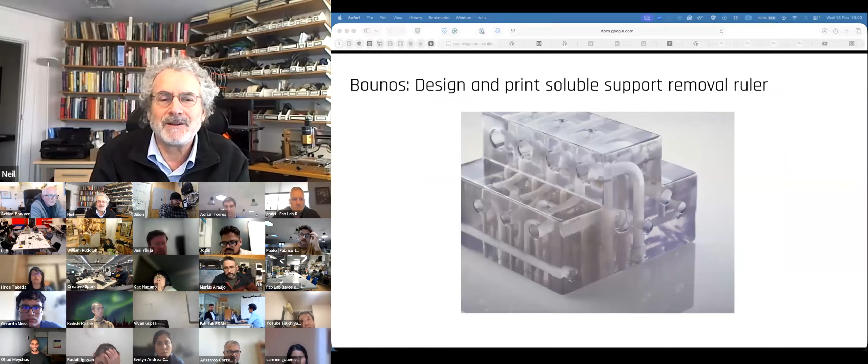And with that, thank you so much, Adrian and Ohad. It was a pleasure to listen to you. Great job, and I look forward—this is one of the more creative weeks. I look forward to seeing what all of you come up with next week. As do I, I think.

Good, everybody. Bye. Bye-bye. Bye-bye. Thank you. Bye. Bye. Thank you. Bye-bye. Bye. Bye. Bye. Adios. Adios.